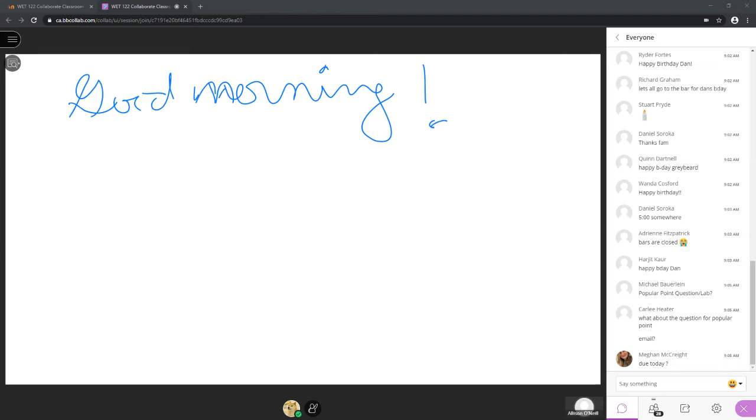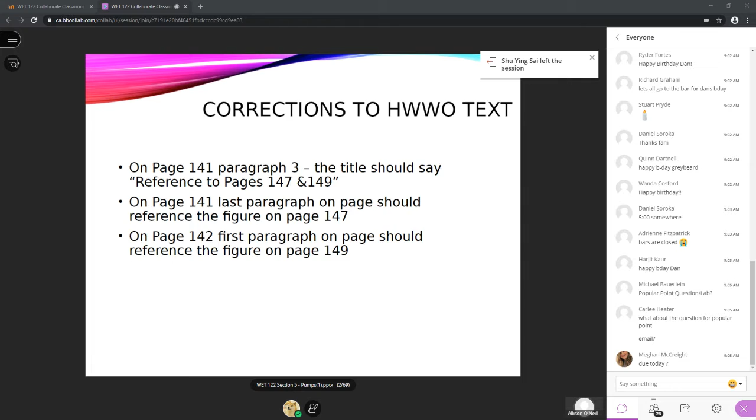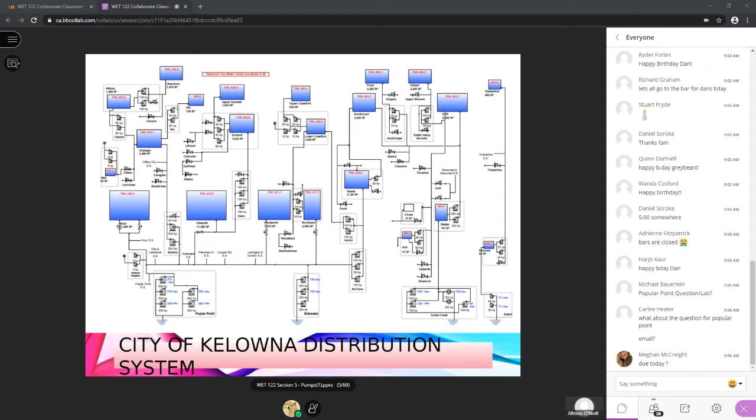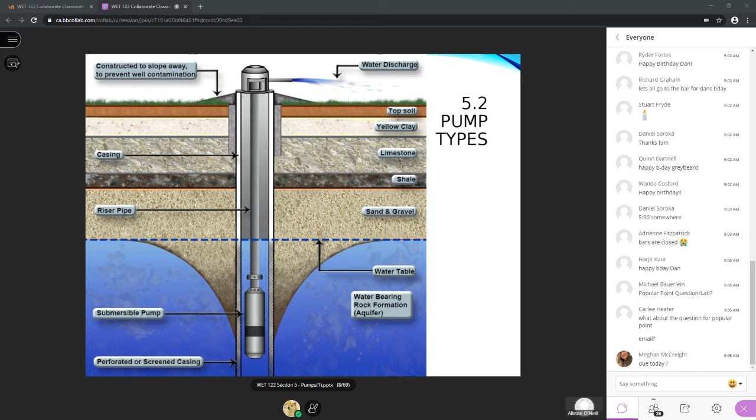All right, so right now up on the screen you should be able to see our PowerPoint slides, just like I would do in class. So I'm going to flip on to where we had left off last week. We had talked about different types of pumps and how distribution systems are configured, including the high lift pumping station, the booster stations, reservoirs, and this was further built on by what we saw on our field trip last day. We talked about recirculation and transfer pumps, well pumps, another example of a well pump, and then other feed pumps. Then this is where we started getting into talking about centrifugal style pumps.

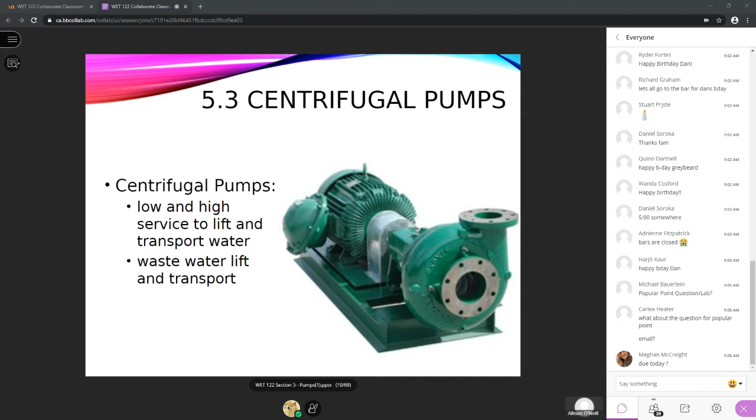So the centrifugal pump is the workhorse of a water distribution and wastewater collection system. They're used in booster stations for distribution systems, and in lift stations and wastewater treatment. Then the other type of pump we see, which is a style of centrifugal pump but has more what they refer to as stages, so it can add more energy head into the water because it needs to lift the water usually to some high elevation, is a vertical turbine pump. Now, vertical turbine pumps, unlike a standard centrifugal pump, can only be used for clean drinking water style applications. There are lots of different reasons why centrifugal pumps are used, but the main reasons are that it's a relatively simple technology.

If you look at the guts of it, it's a spinning impeller, and as that impeller spins, it adds energy to the water, and that energy can be in terms of either pressure or velocity or both. So it's not particularly high tech.

Centrifugal pumps can be quite compact for the amount of work they do, so they can fit in small spaces, which is really important when you're moving them in and out of pumping rooms or pumping houses. They're relatively low cost, and that ties into the fact that we have a shaft that rotates with an impeller on the end of it, and that's really as high tech as it gets.

There are accoutrements you add on to that, and maybe next year Owen can show you a jet pump and some of the other things included in that. Now, all centrifugal pumps belong to a larger category of kinetic pumps.

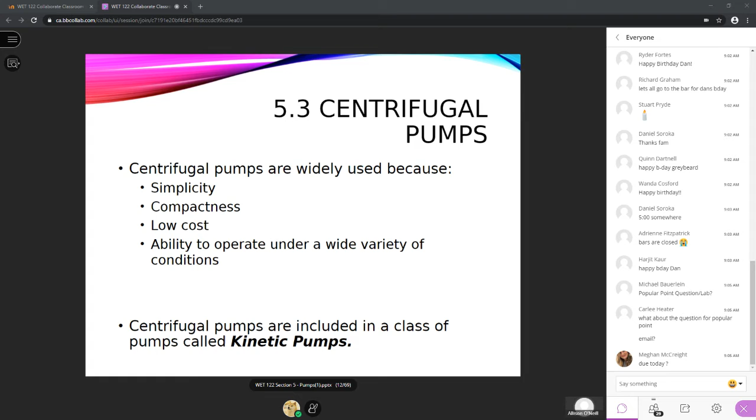They're called kinetic pumps because they give the water velocity energy, and that velocity head is transformed into pressure head. So kinetic meaning moving.

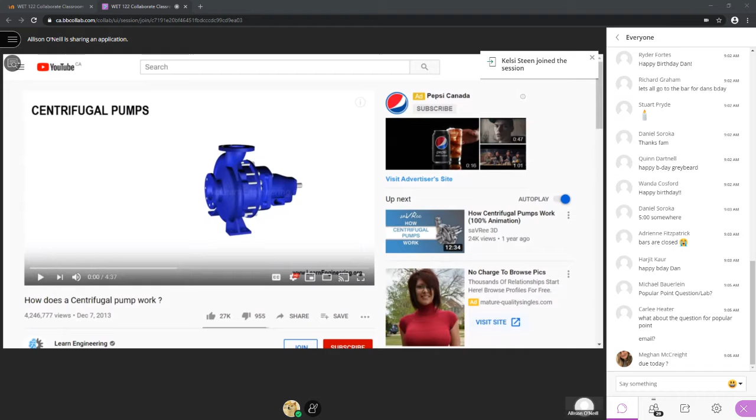All right. Centrifugal pumps are the most preferred pumping devices in the hydraulic world. In this video, we will have a conceptual overview of working of centrifugal pumps.

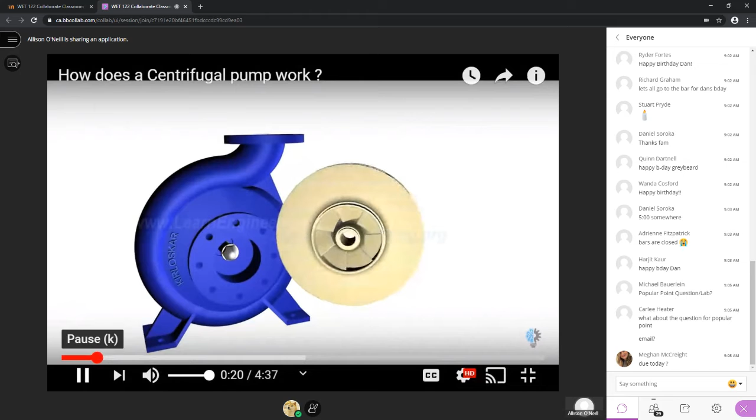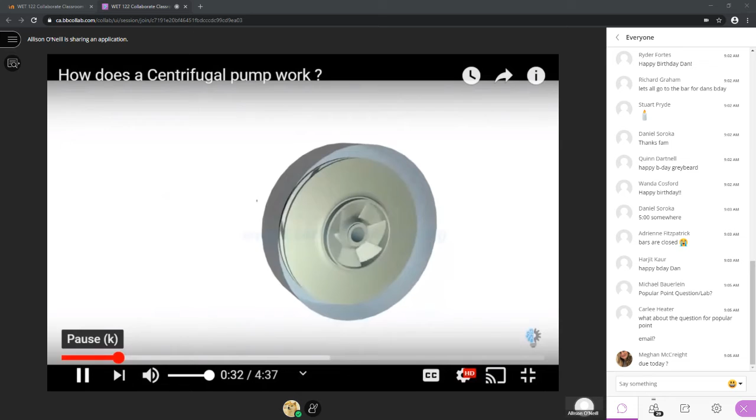At the heart of the system lies the impeller. It has got a series of curved vanes fitted inside shroud plates. The impeller is always immersed in water. When the impeller is made to rotate, it makes the fluid surrounding it also rotate. This imparts centrifugal force to water particles, and the water moves radially out.

Since rotational mechanical energy is transferred to the fluid, at discharge side of impeller, both pressure and kinetic energy of water will rise. At suction side, water is getting displaced, so a negative pressure will be induced at eye. Such low pressure helps in sucking fresh water stream into the system again, and this process continues.

This is the reason why priming is important for centrifugal pumps. If no water is present initially, the negative pressure developed by rotating air at eye of impeller will be negligibly small to suck fresh stream of water.

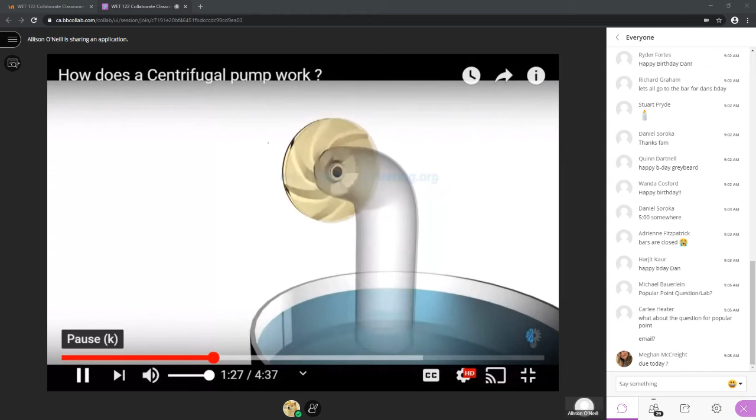Impeller is fitted inside a casing, so the water moving out will be collected inside it and will move in the same direction of rotation of impeller to the discharge nozzle.

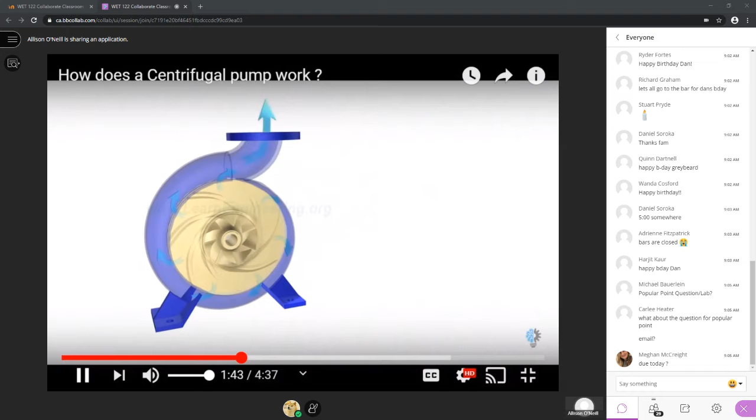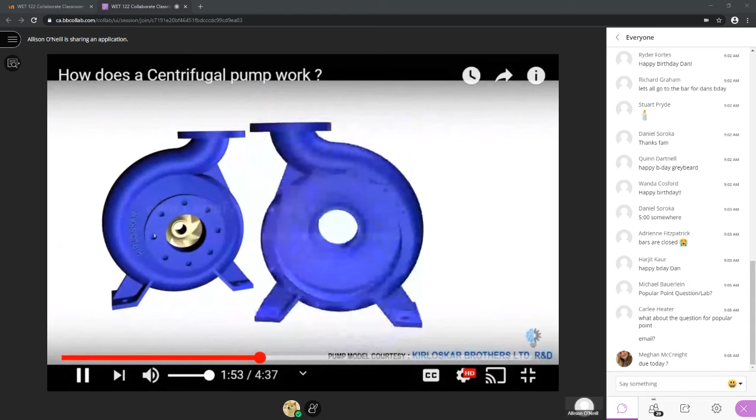Here you can note one specialty of casing: it has got increasing area along the flow direction. Such increasing area will help in accommodating newly added water stream and will also help in reducing exit flow velocity. Reduction in flow velocity will result in increase in static pressure, which is required to overcome resistance of pumping system.

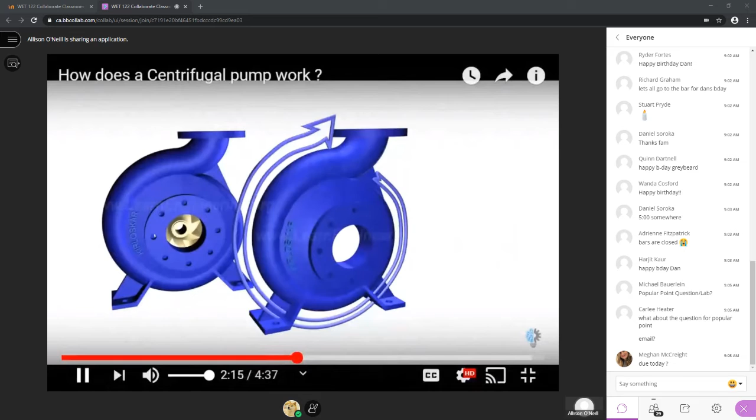Here you can see more details of vanes inside impeller. They are backward curved vanes with state-of-the-art eye configuration. This vane is extracted from a Kirloskar pump model.

If pressure at suction side of impeller goes below vapor pressure of water, a dangerous phenomenon could happen. Water will start to boil, forming vapor bubbles and spoil impeller materials over time. This phenomenon is known as cavitation.

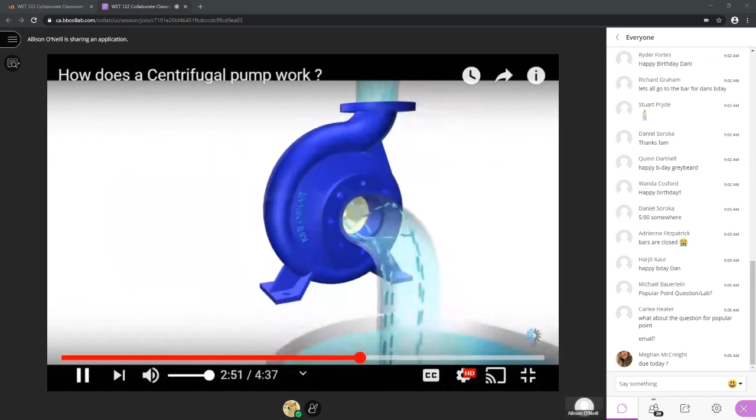More the suction head, lesser should be the pressure at suction side to lift water. This fact puts a limit to maximum suction head a pump can have. Careful pump selection is required to avoid problem of cavitation.

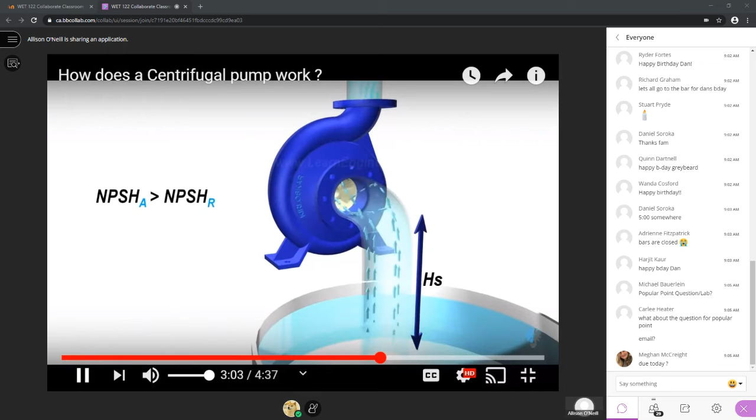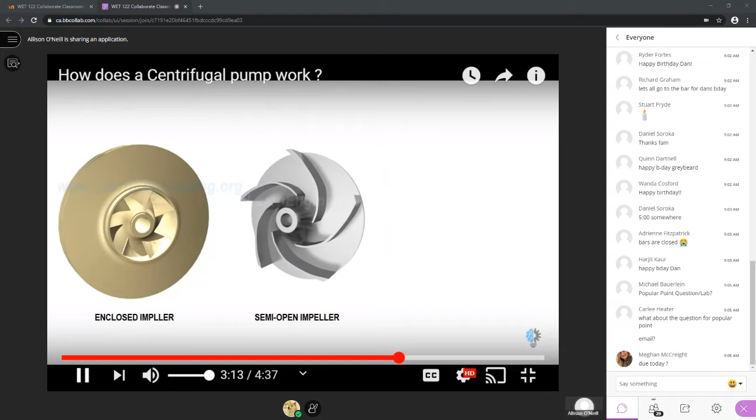Current impeller type is enclosed. Semi-open and open impellers are also in use depending upon application. If the working fluid is cloggy in nature, it is preferred to use open kind of impeller, but they are slightly less efficient.

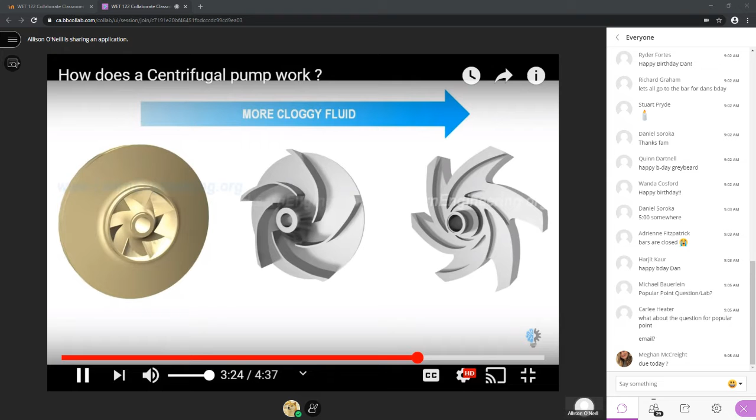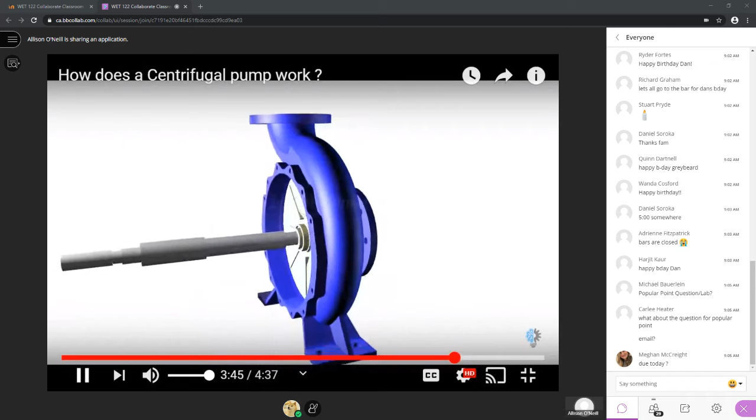Mechanical design of centrifugal pump is always challenging. A shaft is used to connect between the impeller and motor. Since water pressure inside casing is huge, a proper sealing arrangement is imperative in arresting water leakage through shaft casing clearance. Mechanical seal or stuffing box-based mechanism is used for this purpose.

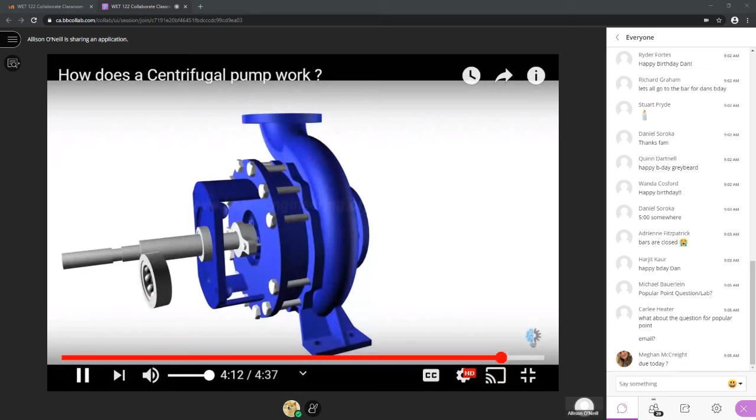Impeller is mounted on bearings, but at suction side of impeller, it is not advisable to fit a bearing since it will block the flow. So bearings have to be fitted at the other end. This means impeller is mounted like a cantilever. For high flow rate pumps, a bearing housing with cooling oil is necessary for improving life of bearings.

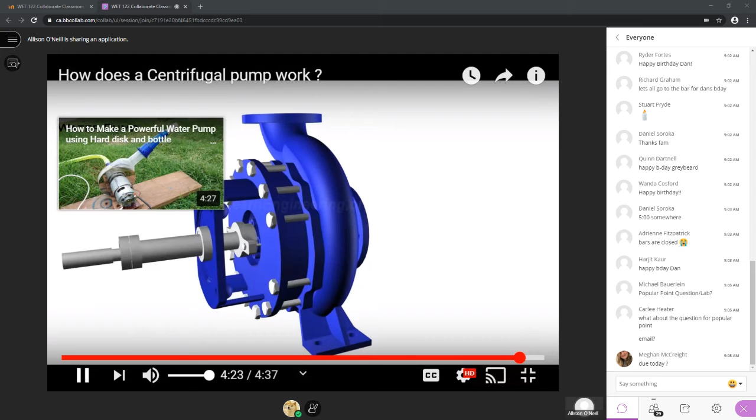We thank Kirloskar Brothers for their technical support and creation of this video.

What I'm going to do now is back up and answer some questions. I'm glad you saw the video. So Richard asks, is cloggy the official engineering term for cloggy fluids?

You could use the word cloggy. We could use high suspended sediments, that's another term you could use. Viscous. But really, when you're talking about impellers, the open style impeller is something you'd use to move sewage, and the closed impeller that's got shrouds around it is something you'd use to move clean drinking water. That's the difference between them. Does that answer your question, Richard?

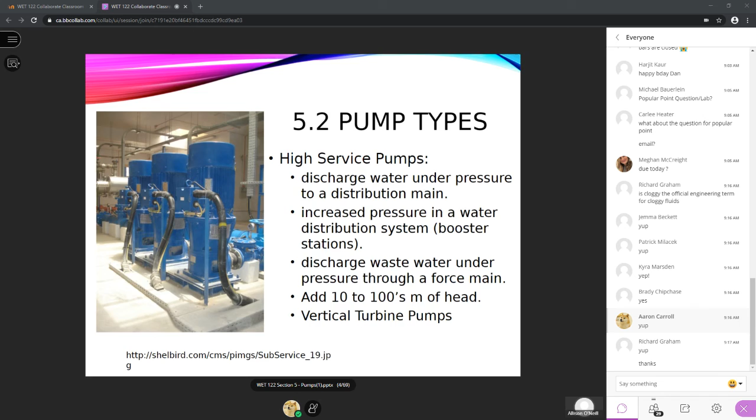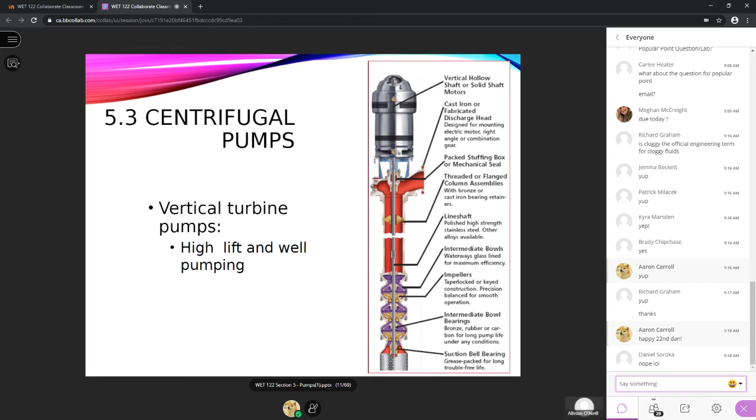Dan, did you have a question? How about Kelsey? No, all good. Happy 22nd, Dan, that's good.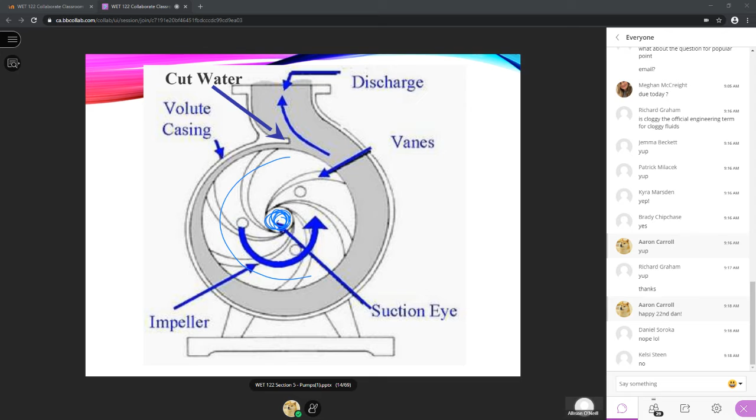So the idea with this, when we're looking at what the inside of a centrifugal pump looks like, the water goes in here, right in this area. This is called the eye of the impeller. So if you can imagine a pipe coming directly out of the screen, that pipe would be feeding water into the eye of the impeller. Then the impeller spins and that water gets flung out to the edges, and it basically starts spinning along with the impeller, in the direction that the impeller is moving.

Now you'll notice, as they said in the video, the cross-sectional area of flow up in this area, which is called the cutwater, is very, very small, as opposed to the cross-sectional area of flow up here, where the water is getting ready to discharge, which is quite large.

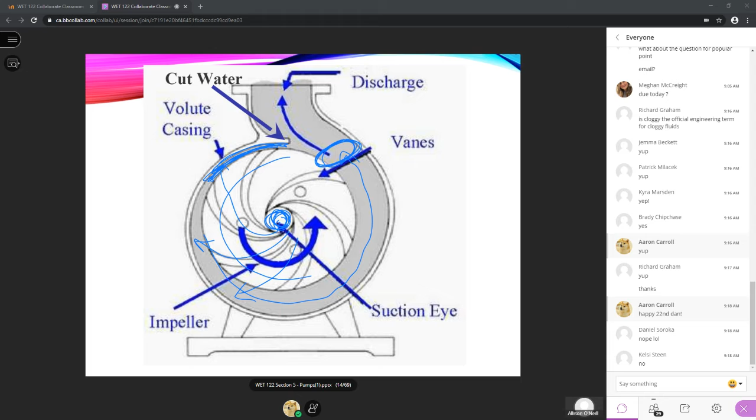Now this is a twofold process. The first reason is when the water gets initially spun out of the eye of the impeller, we want all the energy to be in the form of velocity head. So we need a low cross-sectional area because we need our velocity quite high, because we want the water moving at a very high speed up in this area.

Then as the water spins around in here, the cross-sectional area gradually increases, so that velocity head gets transformed into pressure head, because of the relationship between velocity head and pressure. As the velocity goes down, because the cross-sectional area has gone up, that energy has to be converted into something, so it's converted into pressure. By the time the water leaves the discharge side of the pump, it's relatively low velocity water, let's say 1 meter per second, but it is very, very high pressure.

So the cutwater causes that increase in velocity in this zone, but it also forces the water to leave the discharge side of the pump. Does anybody have any questions about that?

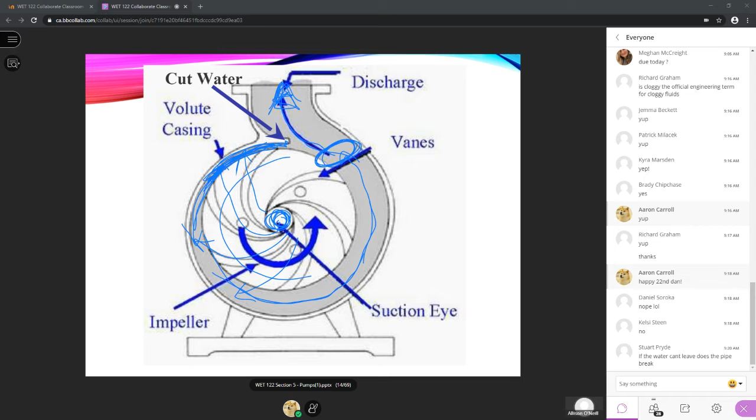Okay, so what I'm going to do is... oh yeah, that's a good question, Stuart. This is something I'll get into a little bit later. So Stuart just asked, if the water can't leave the pump, what happens?

In that case, the water is forced back into the cutwater and has a rapid increase in velocity, super, super high velocity. And when that happens, we have something called discharge cavitation, which occurs when we have that super high velocity transfer of energy. So it goes from pressure to velocity at that point, and we see a very rapid drop in the pressure head.

And we see pressure so low at that point that we can actually cause the water to boil, because there are two ways we can make water boil: we can add heat, or we can reduce the pressure. In this case, we reduce the pressure so the water starts to boil. We'll talk more about that in a little bit, but you won't break the pump immediately, Stuart—but you'll cause extreme problems with overheating as the water spins inside the volute. You'll cause vibration, you'll cause cavitation damage to your impeller. So it's really, really not good.

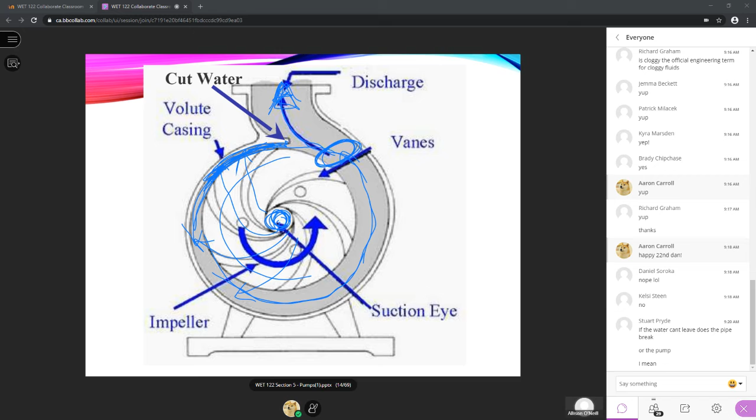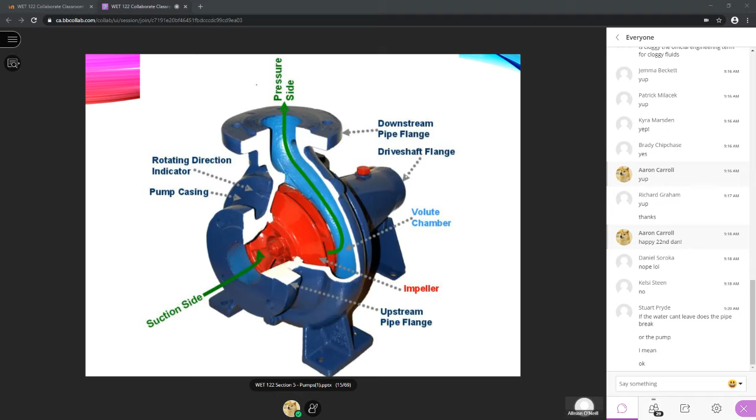I'm going to go on to the next slide here. Again, this is just another view. I've tried to give you a few schematics that you might find helpful. I'm not expecting you to be pump experts, but you should be able to name the primary parts of a centrifugal pump—hint, like exam question. So be able to do that, please.

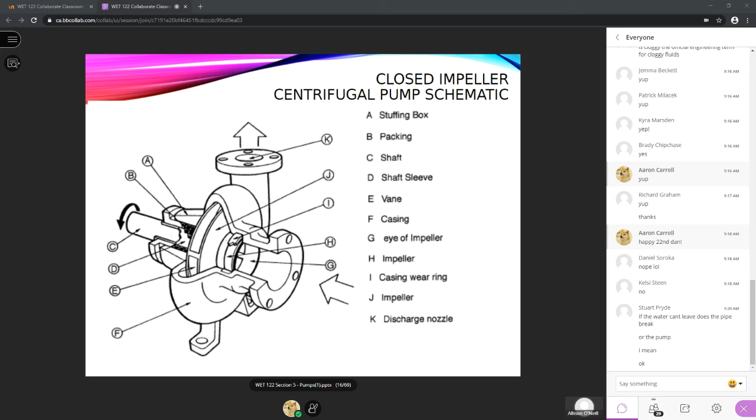So a full open impeller has no shroud plates on either side of it. You would see an open impeller in a centrifugal pump used in a sewage lift station, because you are going to be pumping things where you get solids in there—obviously the things you expect in sewage, but you also get a lot of weird things like rags.

I just saw a little picture from one of my online forums I follow where there was a whole pair of men's underwear stuck in the impeller. I saw another one where a rat had gotten into the impeller. I don't know how that happened, but anyhow.

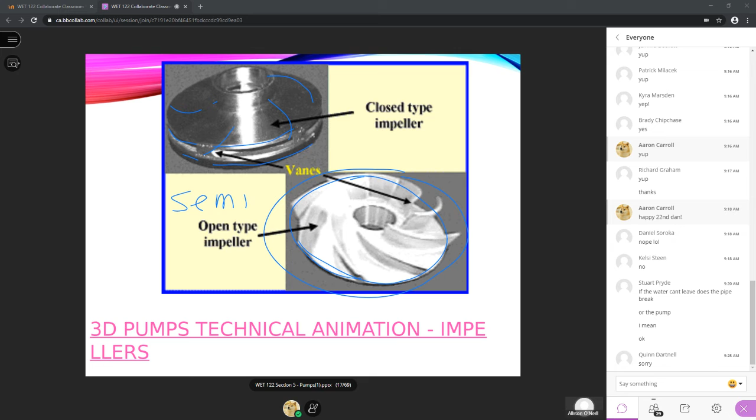All right, so you can see that. That's great, and I'm just going to play it here. Stand by a second, please. Seems like there's a bit of a lag when I bring up these videos, so if everybody can just stand by for a minute, please.

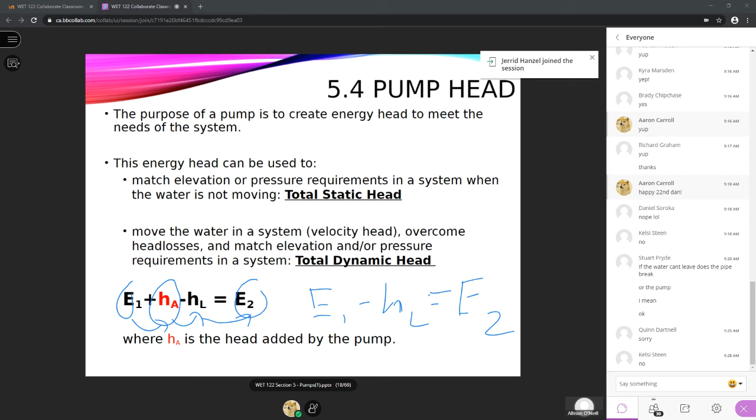Hi, Jerrid. So now we're going to talk about these two concepts again using some diagrams.

So here's an example where we're just looking at static head. We've got no flow happening. So I've got two pumps, each pumping from the same reservoir. I've got a pump here, and it would be extracting water, and that water would be flowing up into this particular reservoir. This pump here would be extracting water into the eye of the impeller, and then discharging up into this reservoir here. But right now we have no flow. So Q equals 0 in this pipe and Q equals 0 in this pipe.

So in this case, the pump still needs to provide enough energy to make sure that the water doesn't come back down the pipe, because we need a flat hydraulic grade line. So this energy that we have at point 1 in the system has to be the same as the energy that we have at point 2 in the system. Or in this case, if we're going in this direction, this would be the energy at point 2.

Okay, so when we say that, we need to provide the total static head. And in general, we kind of don't care where the pump is located. What we care about is where our water levels are. So we need to know that this pump, regardless of how it's configured, needs to provide enough energy such that it overcomes this head differential.

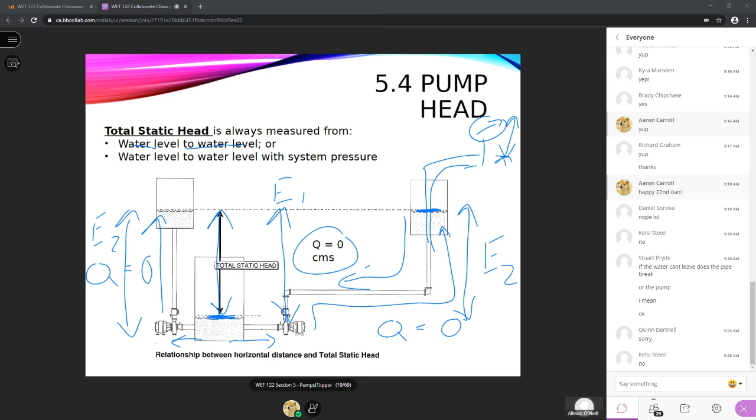All right. Now, this goes back to the original thing. You say here, we've got a pump sitting here, we've got a pump sitting here. Kind of where those pumps are sitting relative to the water levels don't matter. What matters is that each one of them is going to be able to provide this overall static head requirement.

Now, the pump here is giving all the energy in terms of discharge head, and the pump here on this side has basically divided up how it's delivering energy to the system. On this side of the pump, it's giving energy to the system in terms of suction lift, and on this side, in terms of discharge head, whereas over here, it's all discharge head. But regardless of where your pump is situated, it still needs to provide this much overall level of head in your system. Is there any questions out there, folks?

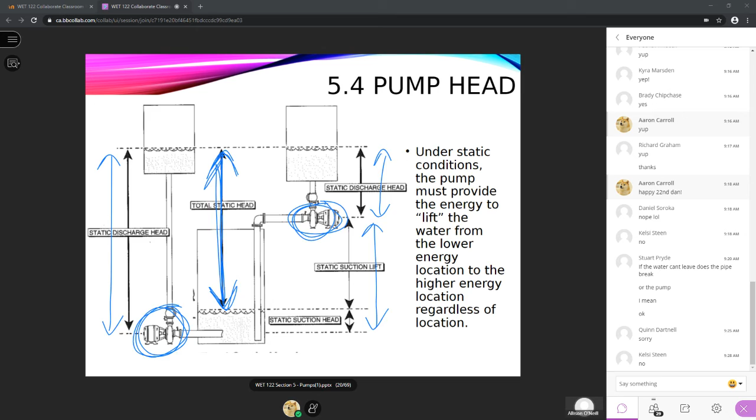Now the next thing is, what are the head losses under those conditions? Taking that out to the team, great, the team is saying that the head losses are 0 also, and that is absolutely correct. Just a reminder, your head losses are completely dependent on your velocity. If you have no velocity, you have no head losses. And in this case, we have no flow rate, so we have no velocity.

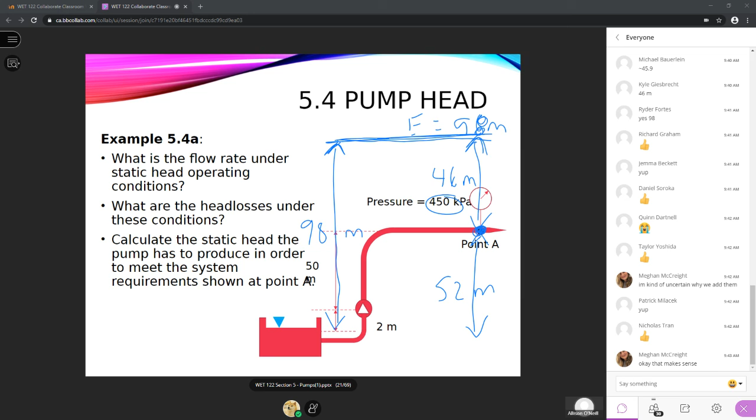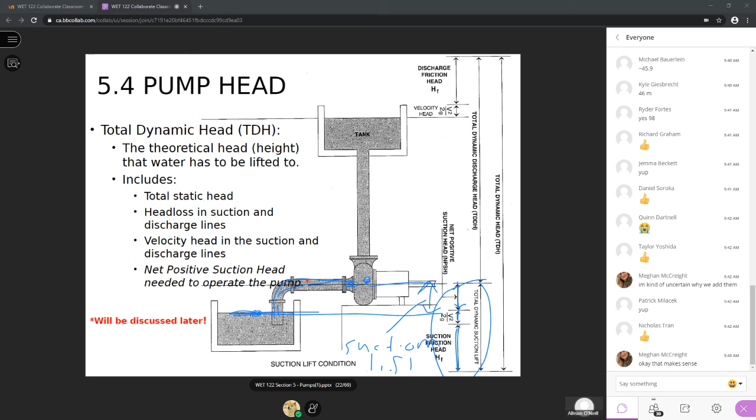Then when we look on the discharge side of the pump, we have to move the water from the center of the pump up to the top of the tank. So that's our original static discharge head. But we also are required to give this water some velocity, we're moving it along, we've got to get some flow rate. So there's our velocity head.

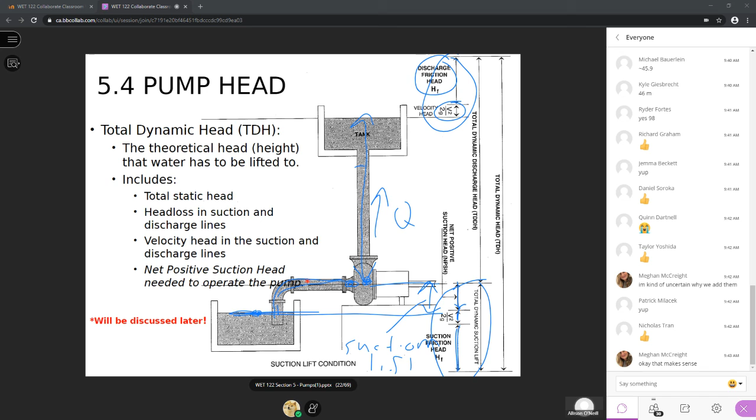You'll notice it's just little because our velocities are always really low in our systems. But we also have friction, so we have head losses that happen inside the pipe that we have to account for. So our total dynamic head is a function of the static head—the difference between the elevations of the water—plus the amount of energy required to give the water some velocity, plus the energy we have to pay in terms of head losses, or friction, to move the water through the pipe.

Now there's also another type of head we need to add into the system, called the net positive suction head. This is a bit of an operational consideration, but it's helpful for students to think about it as: as the water goes through the pump itself, it has friction—lots of turbulence and things happen in there. So the pump actually needs to be able to provide energy to overcome its own friction losses, and that really is the net positive suction head. That varies from pump to pump; some pumps have more net positive suction head requirements than others.

We'll talk a bit more of this, and it's also a topic we're going to get into with actual calculations in WET 222.

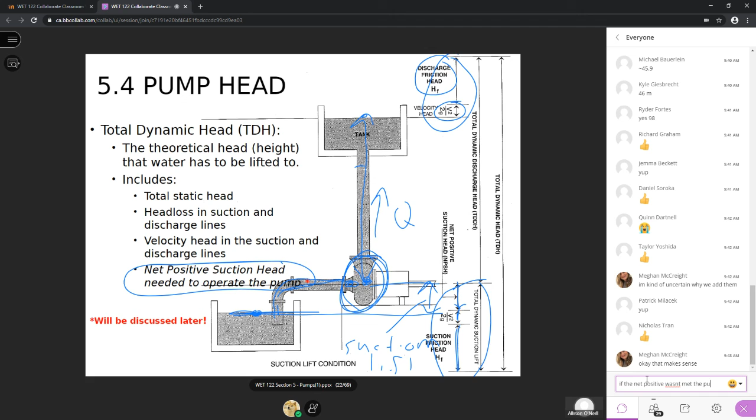Hi, Aaron. It's not so much that the pump wouldn't spin—the pump would still spin. But what would happen is the pump would experience something called suction cavitation. This is different from the type of cavitation that Stu was asking me about earlier, which is discharge cavitation. With suction cavitation, you have negative pressures developing at the eye of the impeller.

Well, pumps are always very, very turbulent, Aaron. Always. We know this—it creates an incredible amount of turbulence. If you think about water coming into the eye of the impeller, doing a 90 degree turn, getting flung out to the edge of the volute through the impeller, getting spun and changed direction through the volute, it's a very, very turbulent process. And the net positive suction head sort of takes into account all of that.

All right, so here we go. We've got an example here that is quite complicated. And I know I said I would lecture from 9 to 9:50, so we've only got 3 minutes left. So what we're going to do is stop before we get into this example. I'll ask everybody right now if you could just give me a thumbs up that you're doing okay and that you can still hear me.